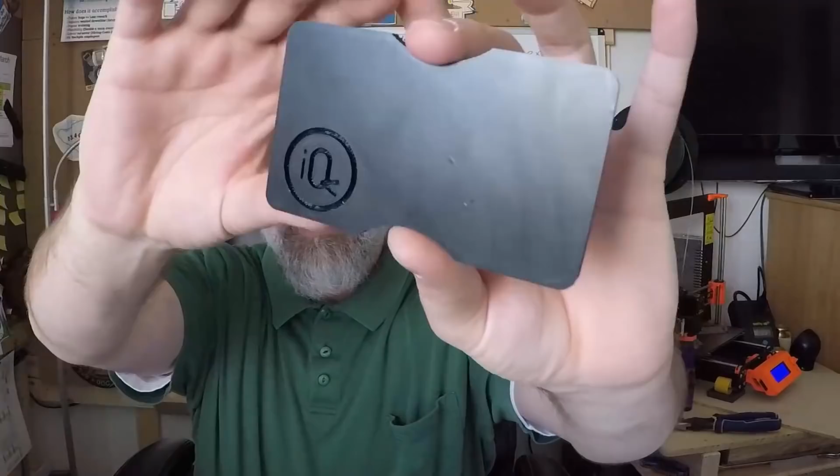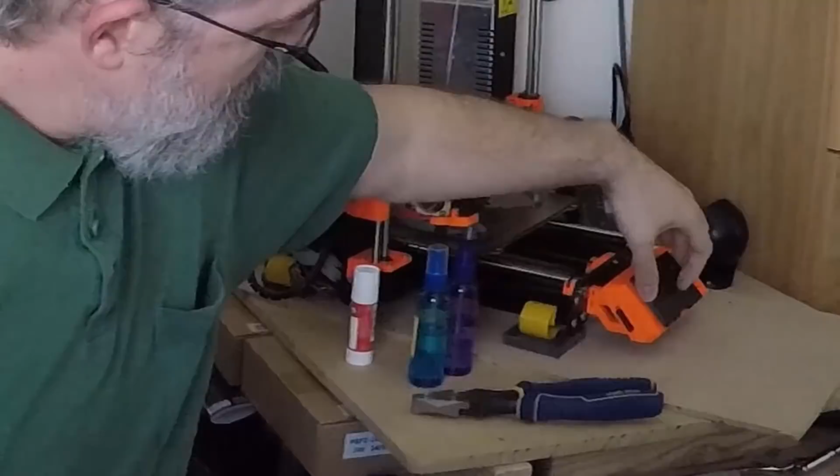Here it is up close, in person. It's just a flat surface with little knurled areas pushed in a bit, just to grab. It has a simple lip that goes up a little, so it catches on the LCD screen. It's a bit small on the screen, so let me try to capture this—you just place it over there and it fits.

That's been working pretty well. At night I just stick that on, and I'm not getting blinded anymore. I don't see any way to adjust the brightness of the LCD screen, but even if there was, you may not want to—it might just be more convenient to stick something like this on. I think it's pretty cool, I like it, so I'm pretty happy printing that out.

Because the light comes through, I printed this with 70% infill. I also chose a darker color, since I've noticed some colors—like this yellow I have—don't show up very well. If I get a bright light behind it, like sun coming in here, I can actually see through it. So you probably want to choose a darker color, otherwise the LCD will shine right through it.

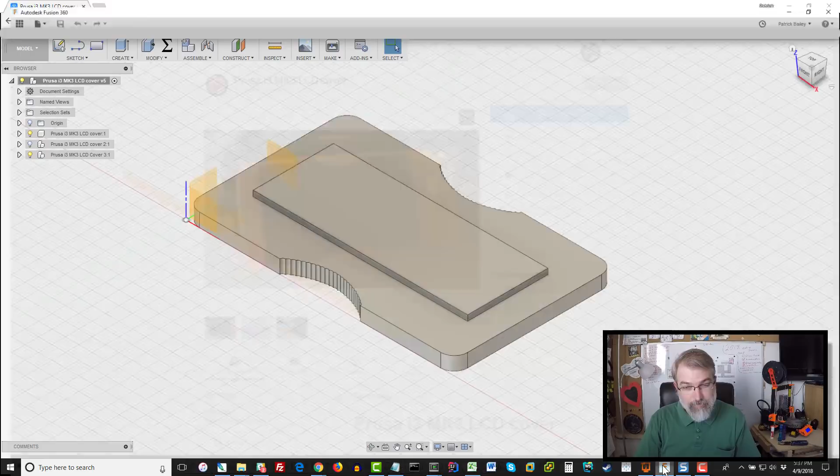I also designed it in Fusion 360, so I'm getting a little better at that. Here's my design—let me rotate it a bit. So there it is from the side, and you can see the little knurled edges there, and the top.

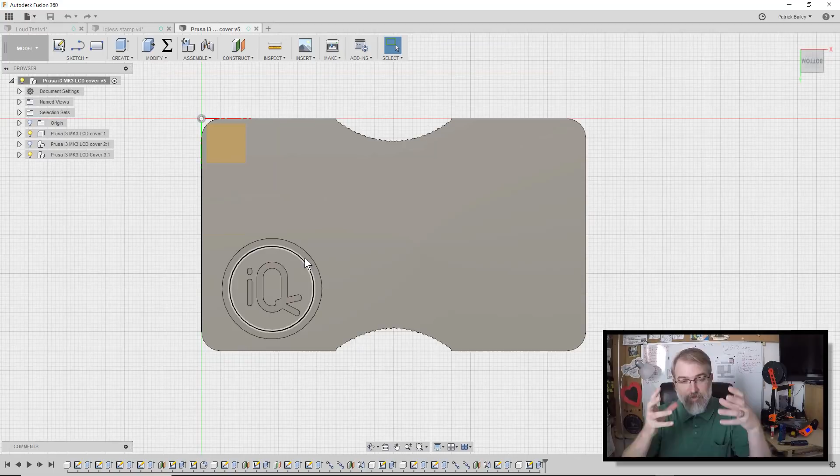If I flip it upside down, I can see there's my little IQless symbol I stuck in there, that my son helped me design—a little idea on that. It's kind of cool to put a little symbol in there. A lot of fun designing that. It was just cool, it was fun, and it worked. It was simple.

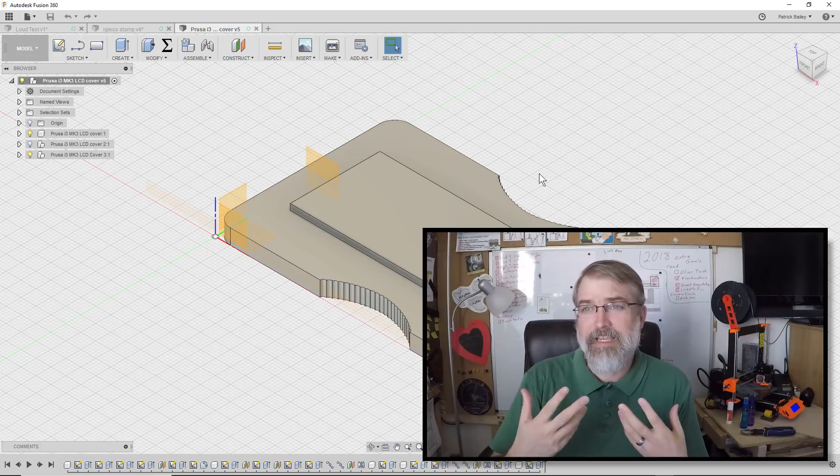Now, one thing I want to talk about quickly is rapid prototyping. The 3D printer was created for industry back in the day for rapid prototyping. If you're unfamiliar, rapid prototyping is when you have an idea that isn't fleshed out yet, so you make a quick, rough prototype to see how it works, because you have to get it in your hand and touch it. Some of the first 3D printers—I wasn't around for this, but I got to see it start, 20-plus years ago.

I worked at a CNC shop in the mid-90s, and the owner was about to order one of the first 3D printers, where you have a solution in a vat and a laser that hardens it. Back then they were expensive because they were new, but companies wanted to use them for rapid prototyping. They could have an idea and print it out in hours or even just a day, which was pretty rapid back then, and look at it and feel it and decide if it was right or wrong.

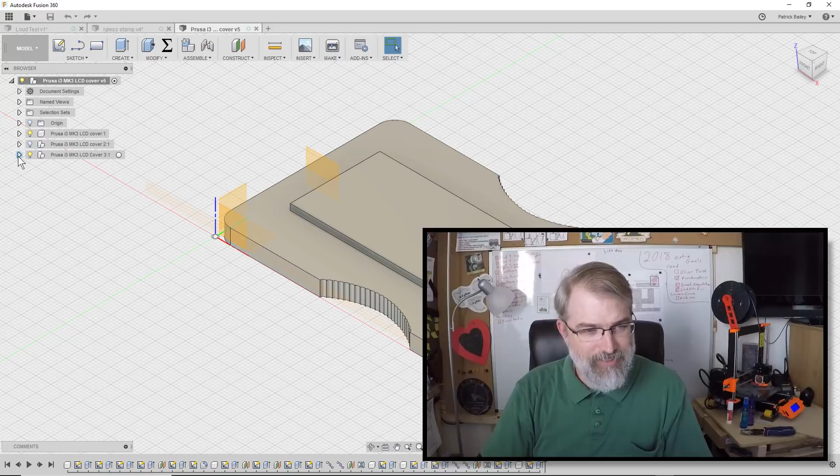Even before 3D printing, people would cut out foam things to touch and feel, or use wood or clay to get a feel for it. So don't try to go for perfection. I actually have three versions here—let me see if I have them all, where I was just trying ideas out. Let me go to the first one. Some of them were just horrendous, but they were rapid prototypes.

So here's my first version, and you can see it is super tall compared to the other one. I had this idea where I wanted to angle them in, so it would actually catch on the edges there. And since I needed it to be out more, I wanted to angle it, and you can print on an angle and have a really good surface up to a degree, but I think this was 60 degrees or so. I don't quite remember, but it was too much, and it didn't get a smooth edge. Then I had this little topper here that I could pull off, and it kind of worked. I mean, it sticks on there, but doesn't fall over, thank goodness, but it's kind of big.

So I was able to have that idea real quickly and print it out and go, yeah, I got the bottom portion right and kind of the right idea, but it didn't work out.

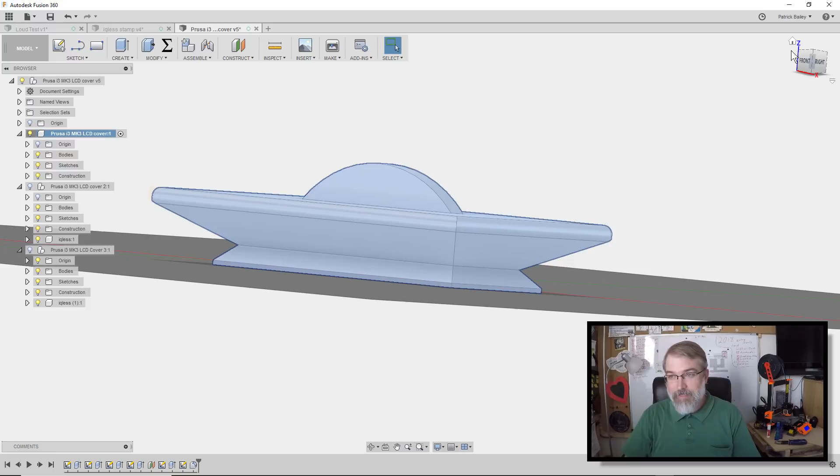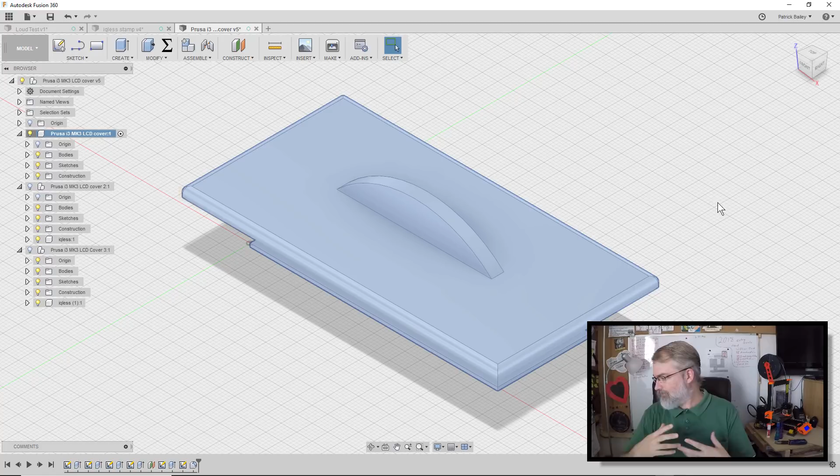Also, I had this idea - I won't say I'm good at this yet because I'm still new, but I like the ideas. If you're going to design something for 3D printing, design it for 3D printing. So design it so you don't have to have supports if you can avoid them, so that it can lay flat, so that it can work really well. I've seen a lot of people do some great designs, like the carabiner design that I printed out before. Great design because it's really flat. He's got it designed so it can just print really well without supports.

So I wanted to follow that. Putting this little top on, I had to print this bottom out first to try to follow that philosophy. The only way I could do it is if I wanted to go perfectly flat with that design, I'd have to print supports, and I was trying to avoid that. So that was my first one.

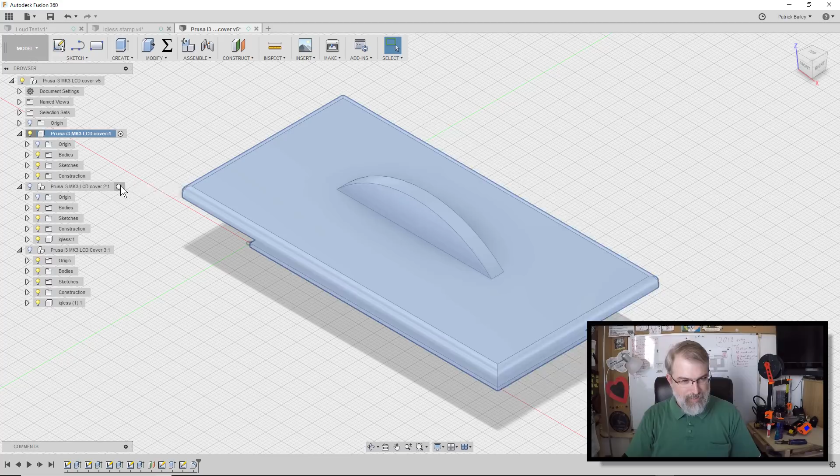And then my second idea I had, so I took some of the ideas out of that. Let me hide that. Are you going to show up? Maybe. Oh, upside down. You're not going to show it, huh? Oh, now you disappeared. I gotta figure these things out, don't I?

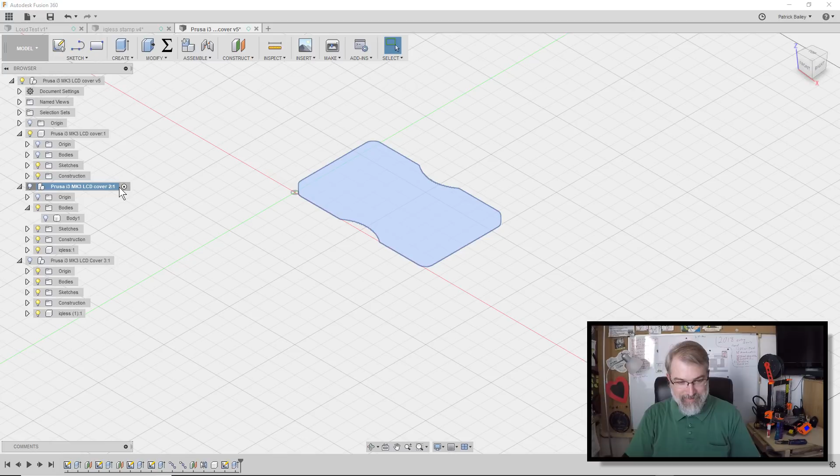We got that. And we got that. There we go, buddy. I need to figure out Fusion 360. Why can't I see you? What did I do wrong? I gotta figure this out.

Anyway, I had a second design. I had the flat top so I could print it like that, but I still angled that bottom. As I angled that bottom, I had to put a higher distance in there, I thought. That kind of worked, but I figured, oh, you know what? I don't really have to go that far. In fact, that bottom should be less than the length of that LCD because it can just lay in there. And so the third design worked.

So prototype: take some ideas, throw something out there, print it real quick, because then you get that feedback. So don't wait for perfection. Sometimes you wait for perfection and you never get there. Anyway, I had a lot of fun with this and I'm using it, so I'm happy.

It's cool. So next, let me go over the numbers for the print. Okay, I got my design working, so I just wanted to show that. There's a little angle there, you can kind of see. That's my second prototype.

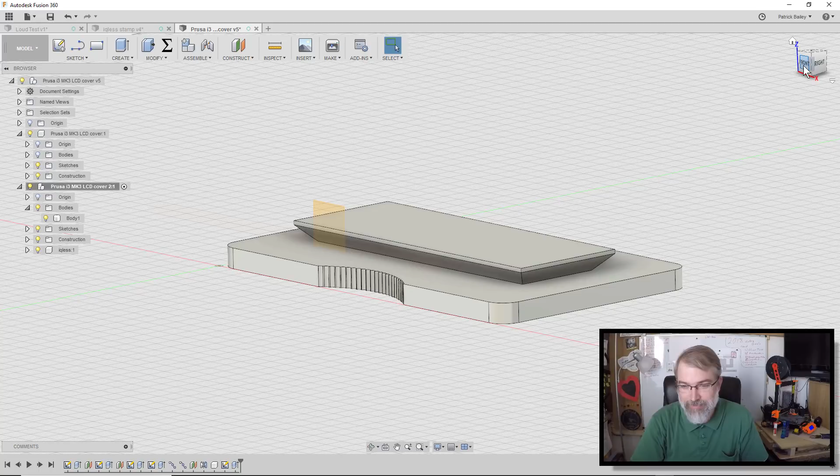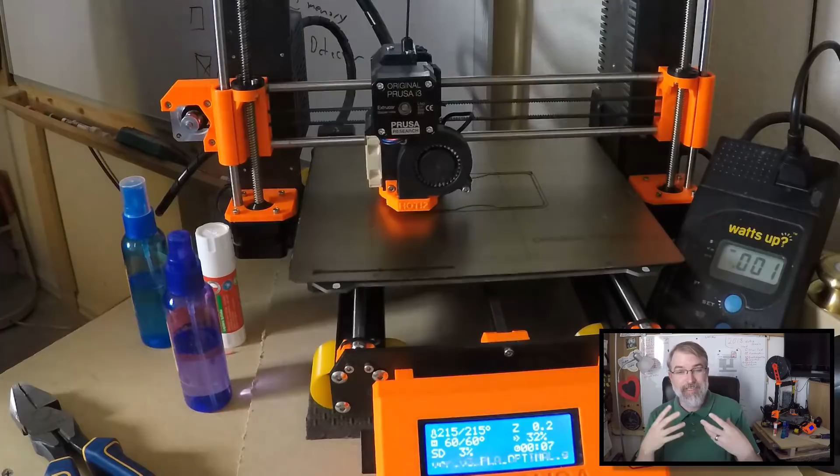Cool. But anyway, the numbers. So first, special situation on these numbers. Normally I'm doing a 20% infill, but because this needs to be thick and make sure that light doesn't come through, I did a 70% infill. So there's a little bit more PLA in it.

So with that in mind, here's the numbers. It took 2 hours and 2 minutes to print. It took 1.7 cents worth of electricity. I'm no longer using filament length, I'm using mass - it took 0.034 kilograms of PLA, and at $20 a kilogram, which is what I'm roughly paying right now, that comes to 68 cents. So if you add that all together and round down, you get 69 cents for the print.

So, not bad. Definitely worth 70 cents, 69 cents, so that I can not blind myself at night. I have been using other things to just put over it and cover it up at night, and it's been working, but I've got a 3D printer, so why don't I 3D print a solution for myself?

Anyway, so hope you liked the video. Hope this is useful to someone out there. And for those who are like me, who like to watch time-lapse videos, here's a much longer time-lapse of this actually getting printed out.